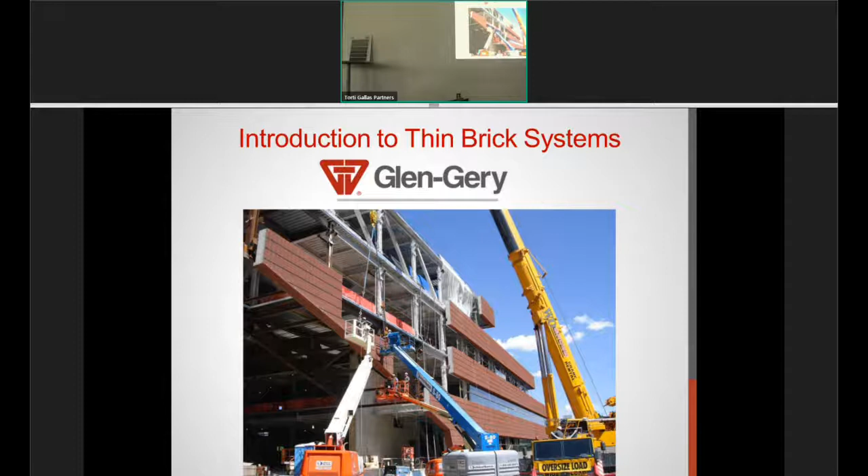Let me stick that in the USB port there. Right on, it's over here. All right, and it even works.

So how many of you consider yourselves maybe beginner or novice as far as thin brick systems? Okay, a lot of you. All right, so that gives me an idea of how much detail to go into here.

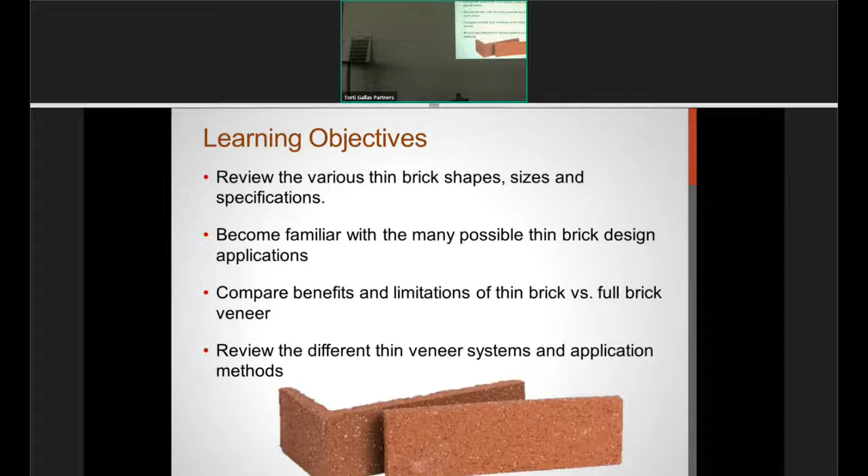So here are your learning objectives: shape, sizes, specifications for thin brick we'll look at really quickly. Design applications—where thin brick works well, where sometimes it doesn't work well, what some of the misconceptions are. You'll see that in the benefits and limitations, and we'll go over typical industry recommendations as well.

The first thing we need to be aware of is that we're talking about a different kind of veneer when we talk about thin brick. It's considered adhered veneer in the code—still covered in the veneer chapter or exterior walls chapter, but independent from when we stack brick up and use anchors to tie it back. Anchored veneer is typically 3 inches or more—that's our typical face brick. It can be up to 40 pounds a square foot, with a mechanical connection securing it to the back. With adhered veneer, one thing to be aware of is there's a difference between adhered veneer and thin brick, just like there's a difference between anchored veneer and face brick.

There are many different types of masonry units that can be used for anchored veneer, different thicknesses, all that kind of thing. So when we talk about adhered veneer today, every time we say it, we mean thin brick veneer, but be aware that adhered veneer could also include things like large format tile, manufactured masonry veneers made from concrete, even natural stone thin veneers. That's all covered in that different section.

So when you look at some of the code requirements in this section, some things will relate to thin brick and some won't. A good example is the sizes of the units—you can see 1/2 inch to 1 3/4 inches here. That's something you won't actually find in the adhered veneer section of the code; it comes from the ASTM standard for thin clay brick.

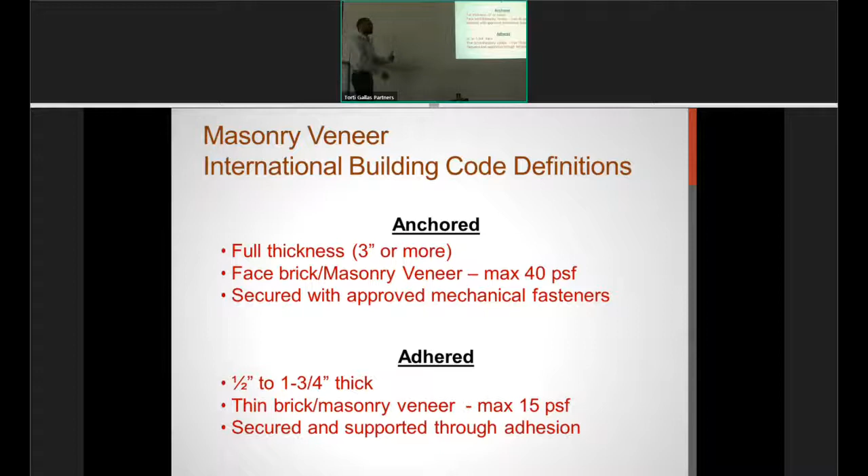Traditionally, as the name implies, these types of veneers were secured through adhesion, with a Type S mortar. If you look in the code, the only prescriptive method for adhered veneer is using Type S mortar. That means everything else - all your thin sets, all your metal panel applications - if it's not Type S mortar, it's approved by the code on the basis of testing. So basically everything else is approved on the basis of performance. You have to do wind testing, water testing, shear testing, all that kind of stuff.

One of the things I like to point out about adhered veneer is that, just like any other wall cladding system we design with, yes, I like it, and it has its applications. But I will not stand here and try to convince you that thin brick is a perfect solution for everything, because it's not.

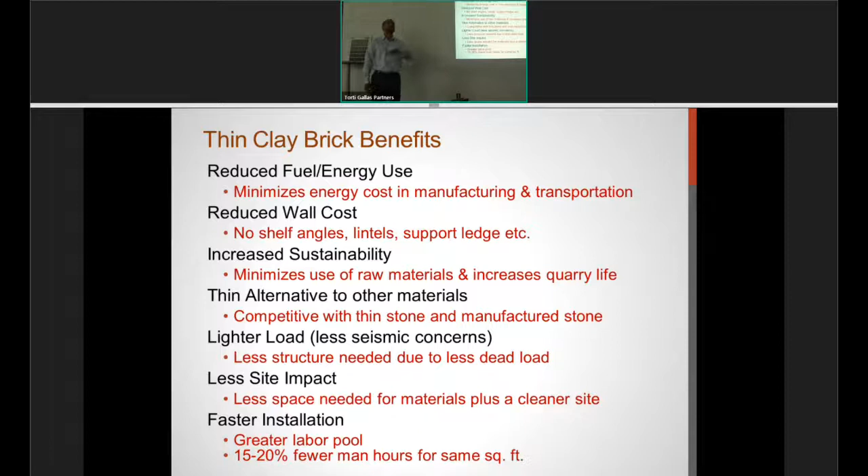As for capabilities, Bruce has already mentioned this—basically we can do any of our brick sizes up to the normal ones you use, up to utility size. We can do corners, we can do flats. We can even do what we call end caps, for when you need a return, like underneath, that kind of thing. Thickness varies.

We saw in the standard that they can be up to 1 3/4 inches. Most of what you'll find in the industry is up to about 1 inch, typically between 1/2 inch and 1 inch on the units themselves. Anything more than that we usually have the capability to do, but it's not normal—it's a special, typically because you want something like corbelling.

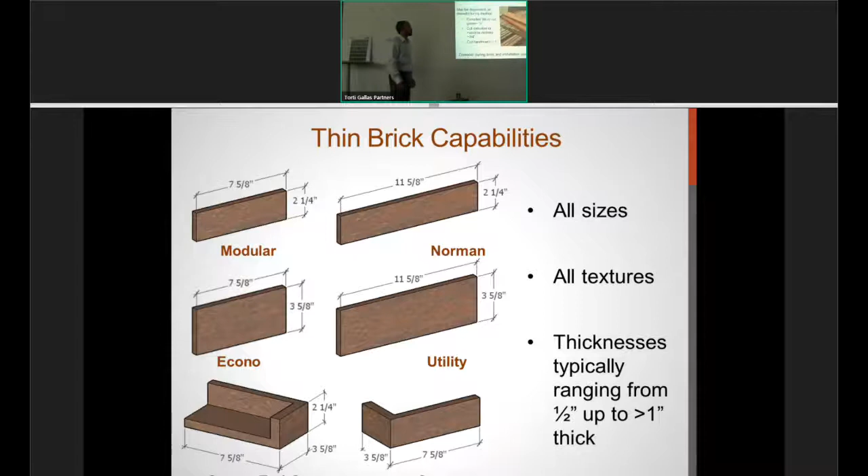So this is why we have different thicknesses. Bruce mentioned one way to make thin brick is to actually make it thin—not make a face brick and then cut a thin brick out of it, but actually make a thin thing.

The tile manufacturers were really the first ones to start doing this, so they're made like tile. The benefit is they're thinner—you usually get a really good uniform product because it's a process intended to make thin units. When that's the case, they're usually about 1/2 inch thick.

We can also take normal brick production, and just like we get a wire cut finish using piano wires to shave off the edges, we can drop a wire down a 1/2 inch, 5/8, or 3/4 of an inch on an extruded column—the way we make face brick—and it'll separate the top off while it's still green and plastic. That's also a way to extrude. In that case, all of that other clay material is perfect—it just goes back into the cycle and gets remade into more brick. So those can also be done at a 1/2 inch, basically from a face brick process.

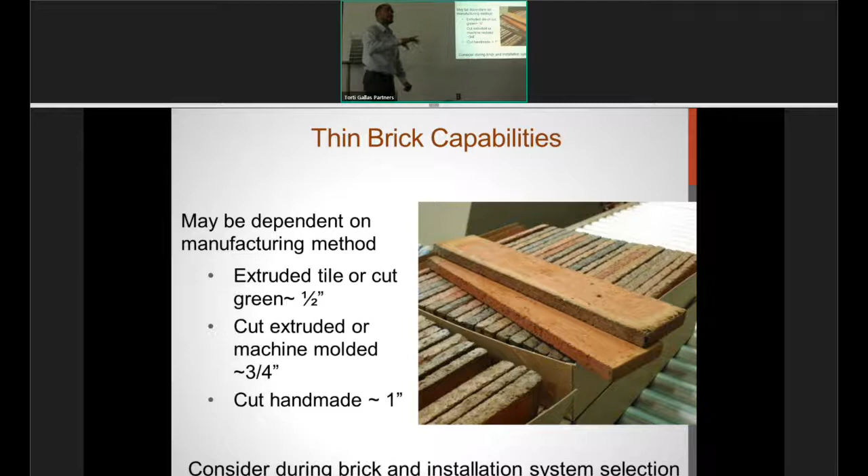The more times we have to touch it, the more we have to do to it, and that's usually reflected in the price. So for example, the most expensive thin brick you're probably going to find is a thin glazed brick - just like a glazed face brick, except now we've got to even cut it. So the manufacturers that have the ability to make a thin brick like a tile, you'll usually find that reflected in the cost. It's also the most economical way to make a thin brick. So that's that.

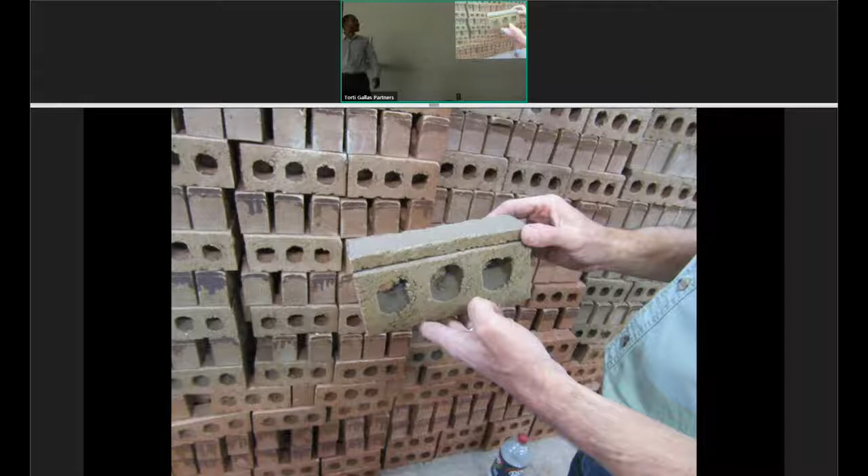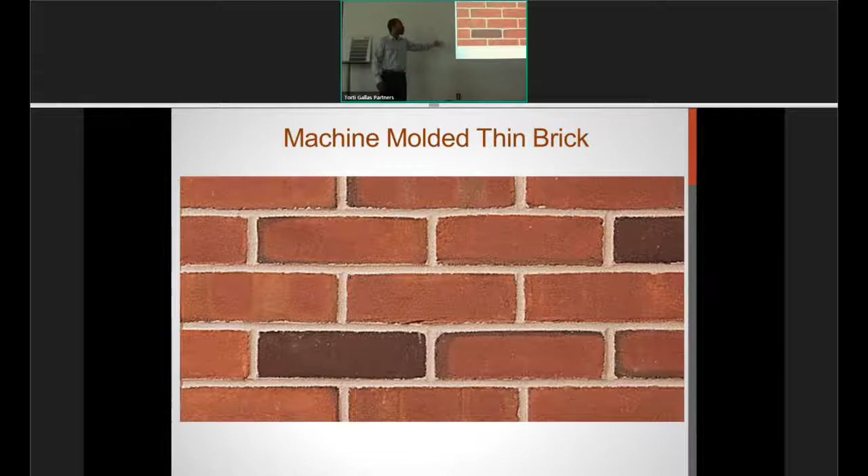So again, all the types of face brick we can do - we can do handmade, we can do machine molded, we can do extruded, we can do glaze, we can do the clay coats. Let's jump across that so we can get to some other things.

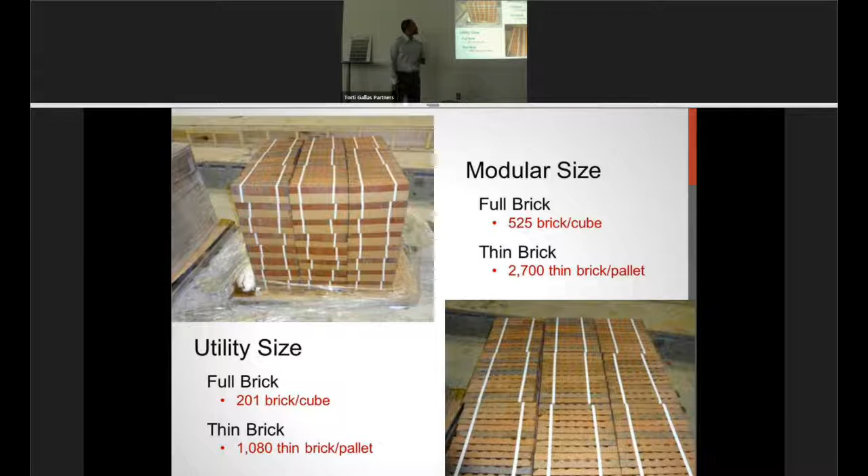So any questions just about the thin brick before we get into the installation systems? Is there a height limit to putting it on without mechanical fastener? There is not a height limit in the code for how high you can go, like there is with, say, anchored masonry veneer. What it comes down to, as far as your height limit, usually what's going to dictate it is your wind loads, because your strength has to be enough that under whatever that level of wind load is going to be, it's got to be able to keep it on the building.

So there aren't any prescriptive requirements. Keep in mind, the only one that's actually listed in the code, telling you what to do, is that Type S mortar - it just says it has to have, for example, a shear strength of 50 PSI, and that's all they tell you. Everything else, though, they've usually done testing - they've had to do the wind load testing anyway. So they typically will have a chart, or at the very least, they can tell you we've tested it up to this pressure, and you can use that to determine your allowable height in a given location.

Who does that testing? Who has done that testing? I'm not sure who did the testing - the independent lab. Because all of those types of products and systems, they're all proprietary. So they'll go and get it done in an independent lab. But we could ask you to give us a test. Absolutely.

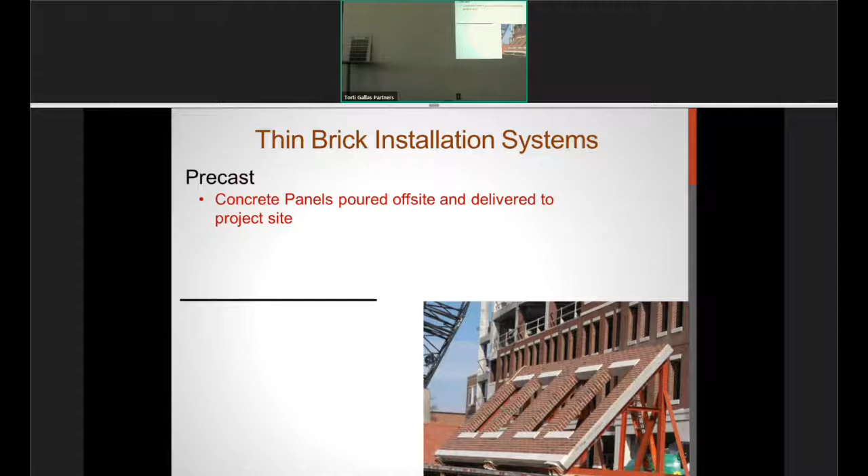Okay, so installation systems. One is going to be precast, or thin brick face precast. Tilt up, which of course is from the concrete standpoint and the pouring, and that is going to be similar - you know the difference between precast and tilt up. We have panelized methods we can use - these are panelized prefabricated stud panels, similar in some ways to precast in how they're erected, and we'll talk about some of the benefits. And then the site applied methods, which are the most common, and that's where we'll start and where we'll spend the most time.

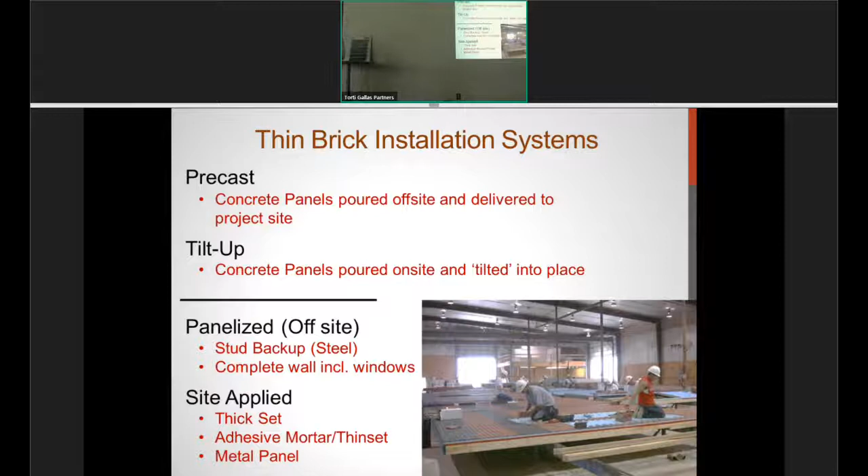So basically what we have is what we call a thick set, which is like your stucco manufactured masonry veneer method. Type S mortar, stick it in there, scratch coat, lath, setting bed. That's your thick set. It can be done over masonry or concrete backup, and it can also be done over frame walls, but it's a little bit different.

Then you've got the next evolution, which was kind of your proprietary adhesive mortars, really aggressive grab. But instead of something that's about an inch thick, now you're talking about maybe a 1/16 or an 1/8 of an inch thick. Again, those can be done over frame walls or masonry concrete. And then you've got your metal panel applications, which we'll talk about. Again, they can be done over frame or masonry concrete.

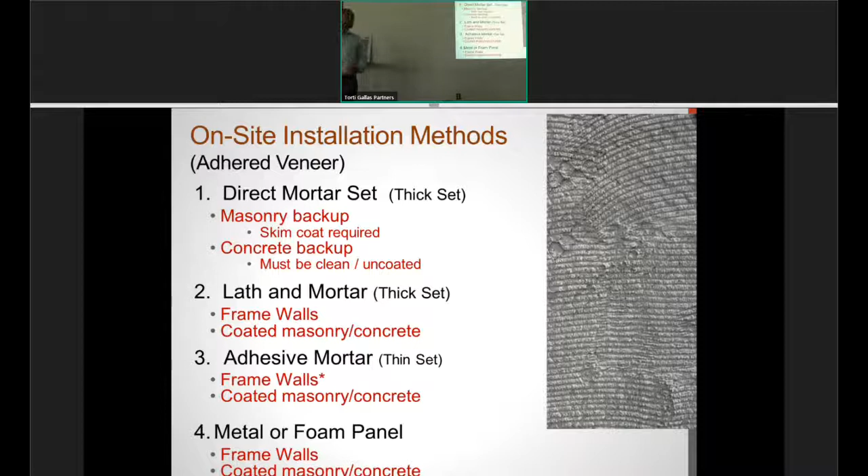So here's an overview of the thick set method. Like I said, in the code, that's the only one that actually tells you what to do. It's prescribed. Basically what it says is you've got to have a Type S mortar bed that's between 3/8 to 1.25 inches. That's the overall thickness.

Because we're looking at masonry in this case, the lath is optional. We're talking about all masonry materials here. So if you've got concrete block, for example, it's got big open pores. You slap a mortar bed over the top of it, you're going to get a good bond. If it's existing masonry, maybe it's dirty, maybe it has some sort of coating on it, something that might interfere with the bond, or you're not sure — in that case, you can put the lath on there.

The lath is mechanically attached. What's the benefit of the lath in this system? So I've got drainage over here. Anything else? Strength. Okay. Is everybody familiar with metal lath? Okay, so there's the lath.

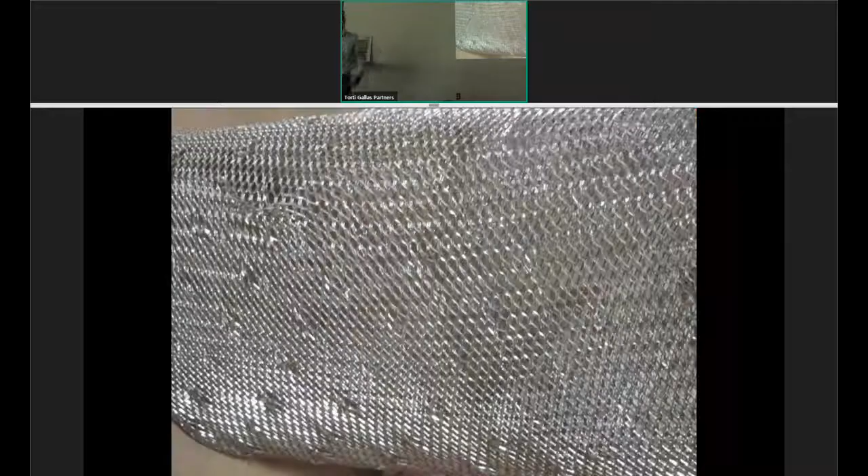What it does, basically, instead of just relying on adhesion alone, is mechanically attach your mortar bed to the backing. There's two types of lath. One is just a flat lath, standard lath, and they also have what's called self-furring lath. Self-furring lath has these deformations, basically pushed in every once in a while, and what that does is it makes it stand out from the wall instead of lying flat against it.

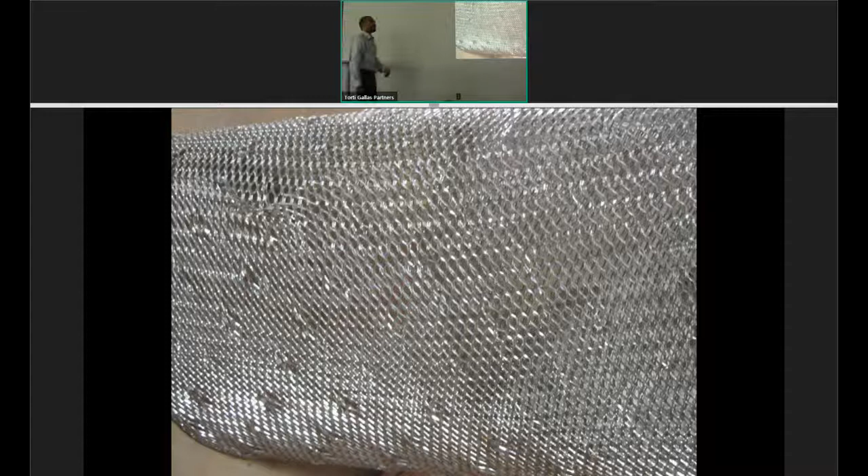Which one do you think would be recommended in the system? Okay, the self-furring lath, because instead of just laying flat against the block or the substrate with your mortar going over the top of it, it sits kind of in the middle. It makes sure that it keys in. So when you fasten that in there, now you know for sure that you have a mechanical connection. So the self-furring lath is preferred. If you use a flat lath, they also have furring fasteners — you can use a special fastener that gets that to happen.

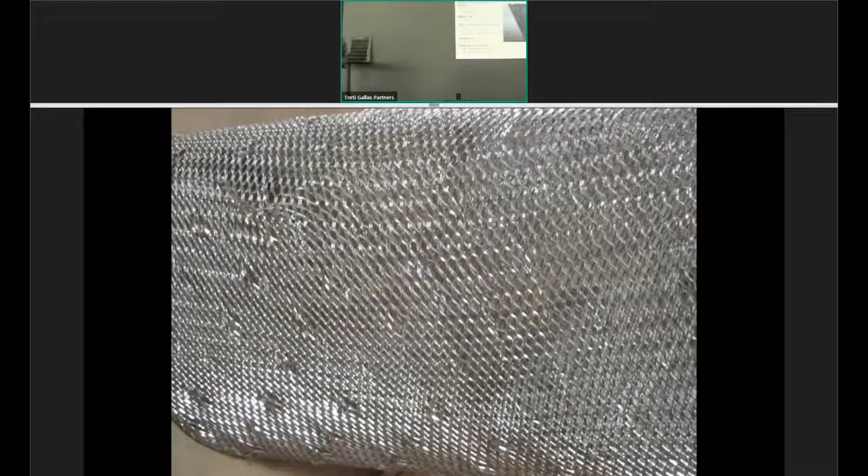So we'll go back to this. Flashing and weeps — this is going to be true for all of these systems. You do the same things that you would do with adhered masonry veneer: top of the wall, bottom of the wall, any penetrations, any interruptions. In this case, you may not have an airspace, but you might have something like a drainage mat behind it, the stucco product. It is, yeah.

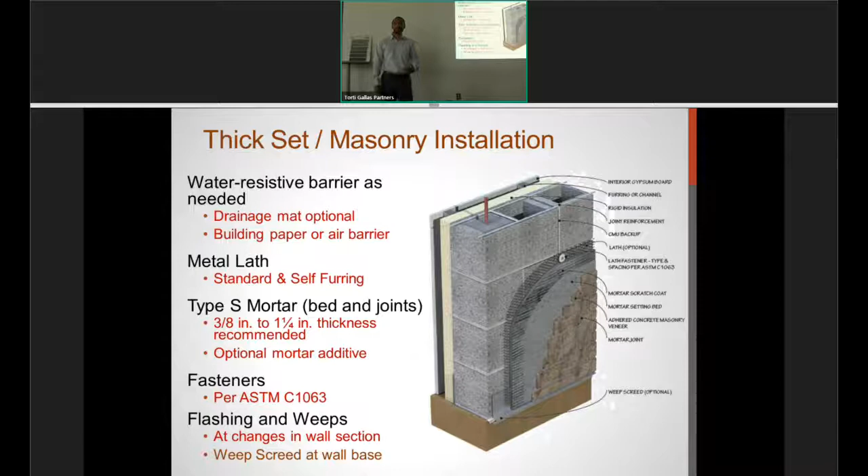All right, so if we look at this method over a stud back, one of the significant things that changes — actually, I need to go back to this. In most cases, you're going to need an air barrier in the assembly, so you're going to have something that functions as both. If that concrete or concrete masonry wall is designed and built in accordance with their respective chapters of the code, you're not actually required to have a water-resistive barrier. You're usually not going to skip that, but I point that out because that's one of the differences between when you put it on frame.

When you put it on frame walls, the standard, the default is going to be that you need 2 layers of a water-resistive barrier, or something that has the testing to show that it gives you the performance of at least those 2 layers. If you happen to know the ASTMs, that's D226 Type 2 — basically, it means it has a 60-minute performance, okay? So that's important. There are some cases, and with that Type 2, you can do 1 layer of a Type 2 water-resistive barrier, and then you can use an airspace or a drainage mat, and you're good. You don't need anything else.

So the lath, in this case, is a critical component of the system because that mortar is not going to stick to fiberglass face sheathing. All right.

I'm sorry, I jumped. No.

So still the Type S mortar bed again, in this case with mortar additive. You can use it in the other system too. In this case, it's going to increase your bond and increase your durability.

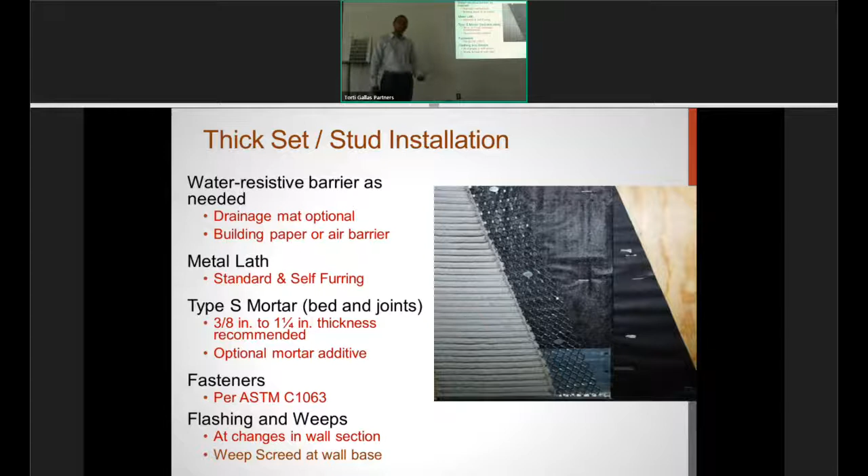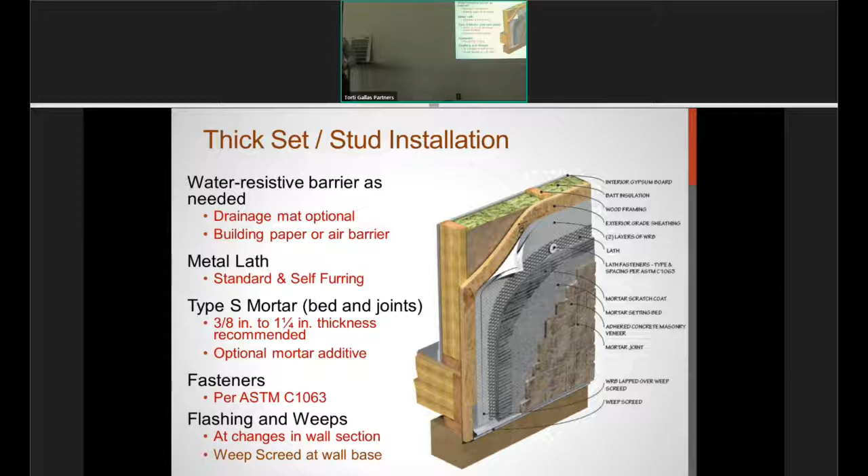The fasteners that you see there are just the lath fasteners, don't worry about that. So there's a look at that system. Big difference you can see is the 2 layers of water-resistive barrier, and now that lath is a critical component of the system.

This shows a pretty typical process. Top left, you've got your water-resistant barrier and your lath attached, with the scratch coat going on at the bottom. Top right, it's being scored. And in this case, bottom right, he's not actually doing a mortar bed on the wall, a bond coat. He's just back buttering the units, then he'll apply it, and that's an acceptable method.

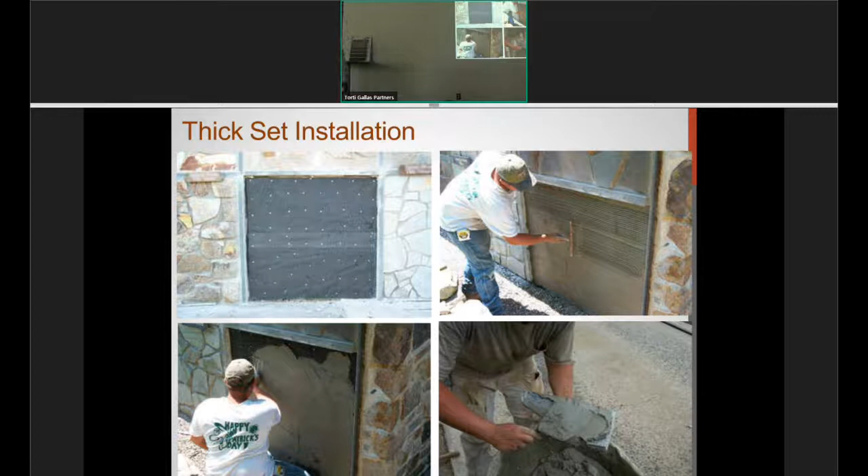Pretty simple. This is the installation method that relies the most on the mason's skills to keep everything level and plumb. Keep in mind, your backing matters. This is one of the differences between the systems - how flat your substrate is.

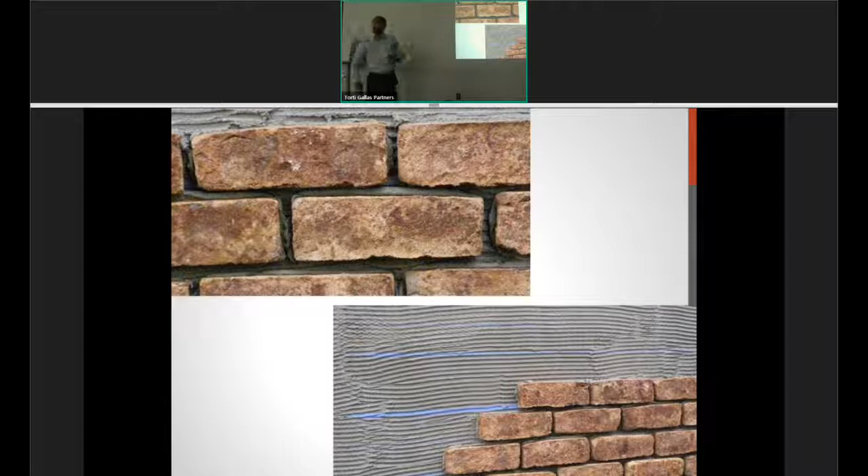In this case, you've got roughly an inch or so of mortar that you can actually make up any small variations in the plane of the substrate. With some of the other methods we're going to talk about, you don't necessarily have that.

Any questions about thick set? It keeps water from getting behind it, freezing and popping the brick.

But we never use it in this climate. I was about to say the same thing. Like this method is why we were always so reluctant to use it when it's full stories up in the air and worrying about it popping off and hurting somebody. So we only used to use this when something was turning back over a roof before the mechanical attachment. You see it a lot in one-story retail.

Yeah, exactly. It is the most widely used method. It's the most widely used method because it is the most economical method. It's the cheapest one to do.

But it's been done for a long time, and we've probably all seen, or if you haven't, the rest of us could easily show you where there's a failure of this system. When it's done right, it can work, but there are a lot of things that can go wrong. The standard at this point, which we didn't show here, would be if that system is done, there's almost always a drainage mat behind it, so at least if water gets in there, it has an opportunity to drain out and dry out, reducing the potential for freeze thaw and that kind of thing.

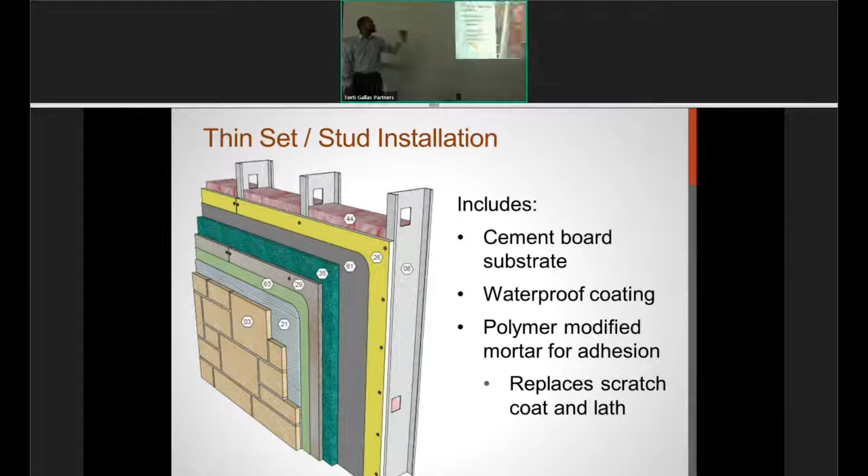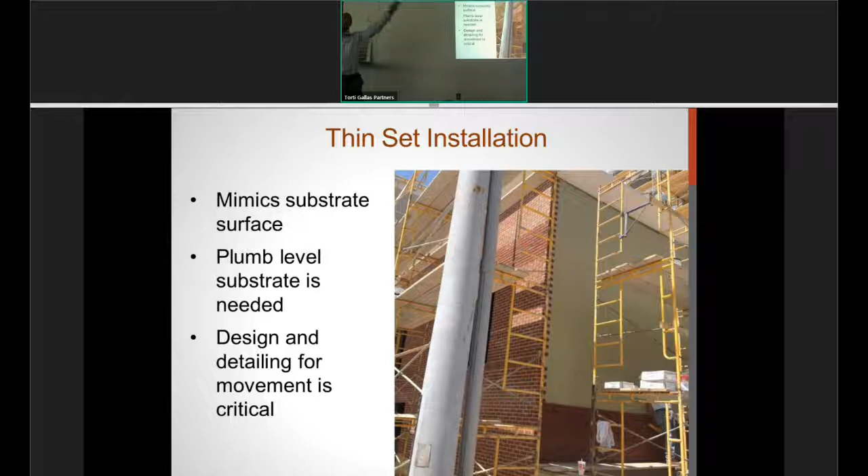I will point out that among all the systems, this is probably the most expensive. So if you're doing, let's say for example, a whole interior, this is one of those cases - maybe you use this system for the ceiling, but for your walls you use something else.

Questions about thin set? Okay, then we've got metal panels.

So with metal panels, the default as far as your water resistant barrier is going to be the same as with the other systems. If you're over concrete or masonry, you don't necessarily need one. If you're over frame, then the default is going to be 2 layers. This is where things vary a little bit - there's a few different kinds of panels out there.

One kind of panel is going to have a flat profile. So if you've got a flat profile panel, you're going to have your 2 layers of water resistant barrier behind it, or your 1 layer of water resistant barrier that gives you that type 2 enhanced performance, with a drainage mat or a drainage space.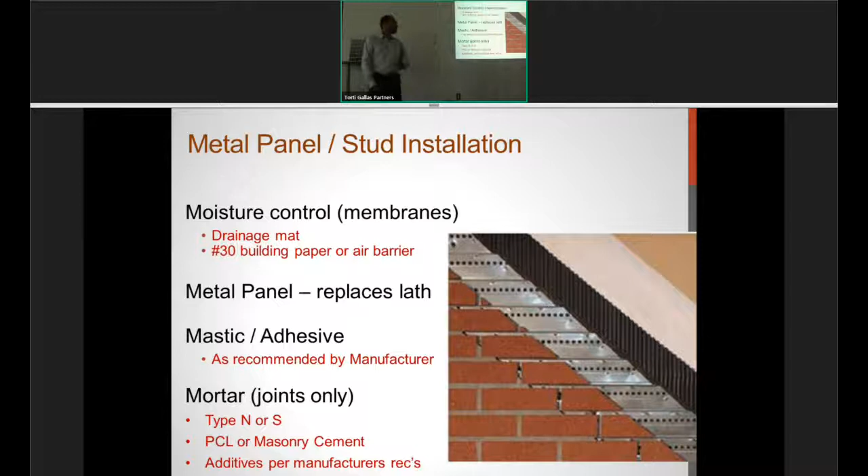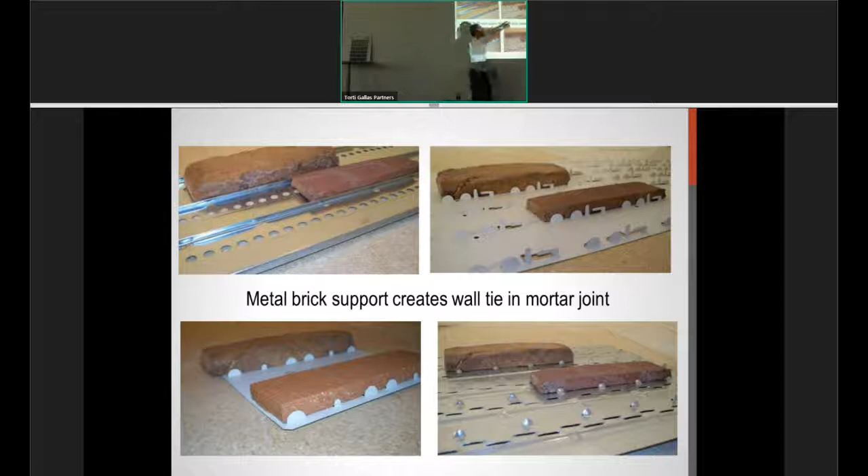You can see the first one shown here, yeah, there's no actual clip. With this one, these little parts right here can be bent down, and so when they're bent down, they act like a tie when you put the mortar in, which is great as long as you're paying that one guy to go and bend all the tabs down. Because the warranty for that system depends on that.

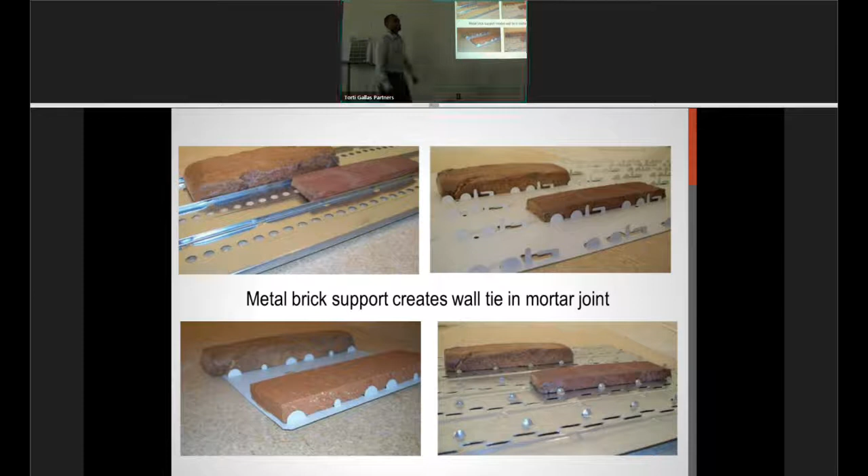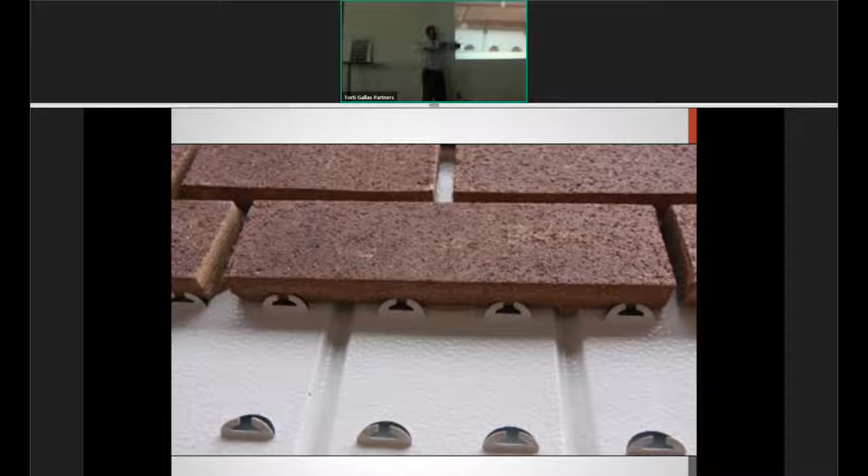There's an example of another one. In this case, because it's open, when you put the mortar in there, it grabs it without someone having to bend it down or anything like that. There's a shot of it from the back, so you can actually see how it engages the mortar.

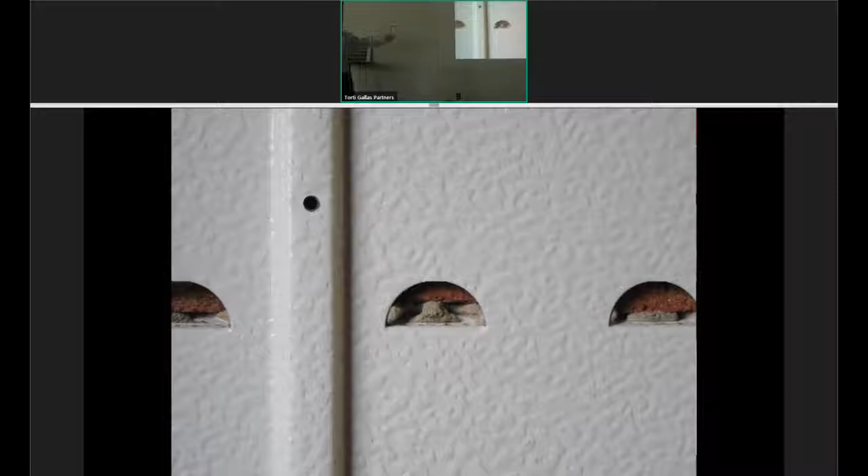So there's standard panels and there's drainage panels. One of the reasons we're seeing a lot of this is because you can add continuous insulation into your wall without increasing the thickness of the wall. If you need 3 inches of insulation and you're doing face brick cavity wall, your wall just got 3 inches wider. In this case, you could do a 1-inch veneer, 3 inches of insulation, and you didn't change your overall thickness.

A couple of things to keep in mind, this stuff weighs up to 15 pounds a square foot. So when you're putting that right up against the backing, your fastener doesn't need to be that great, but when you're hanging it 3 inches off the wall, you need a more robust fastener. This is just like with our anchored veneer, when we started making those cavities wider because we wanted to put all that mineral wool in there, we had to do engineered fasteners or engineered anchors, the same thing happened here.

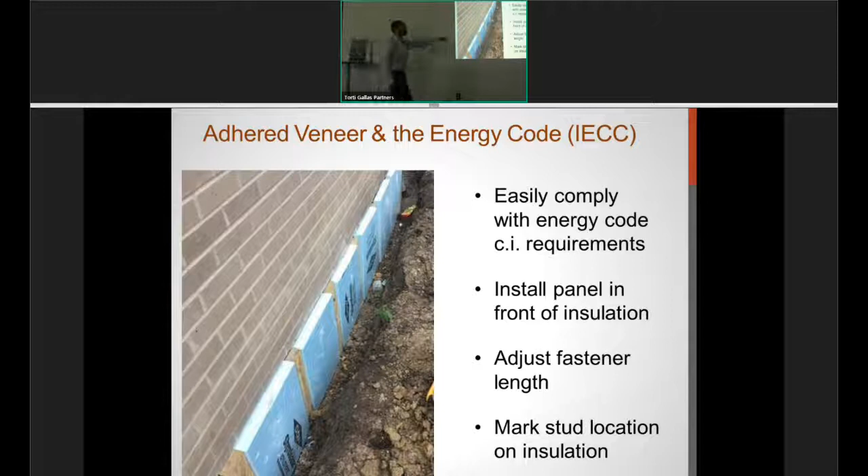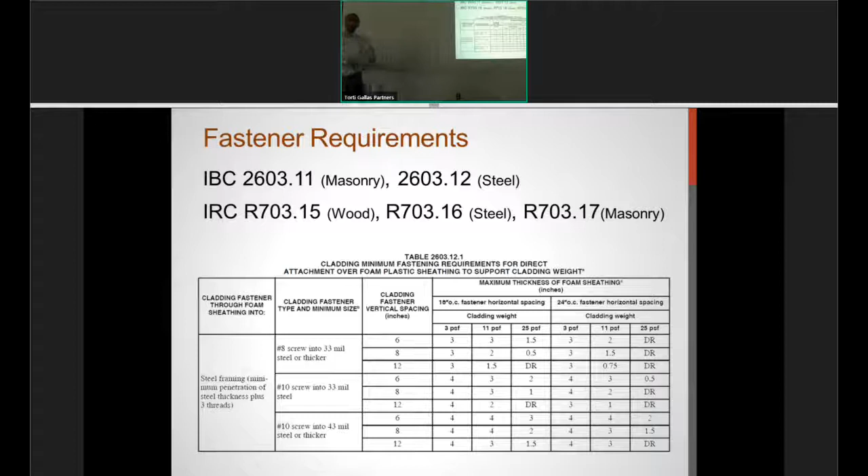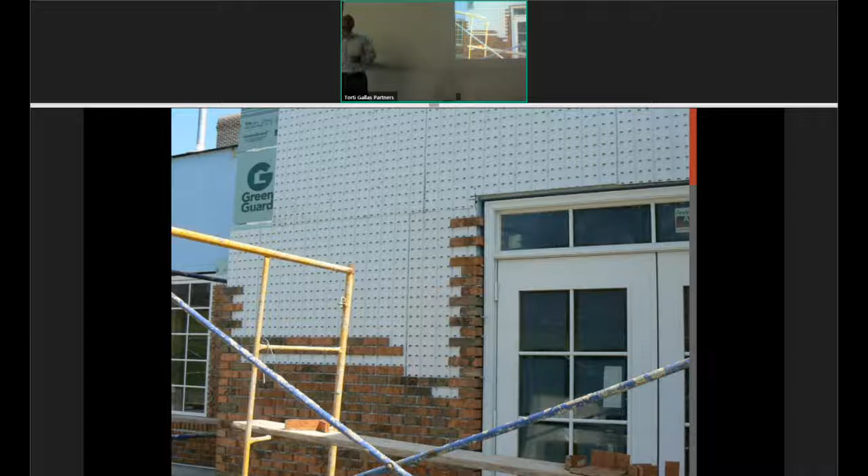All right, so this just shows one of the panel systems going up. You can be kind of schizophrenic with them. You don't necessarily have to start at one place, end at one place.

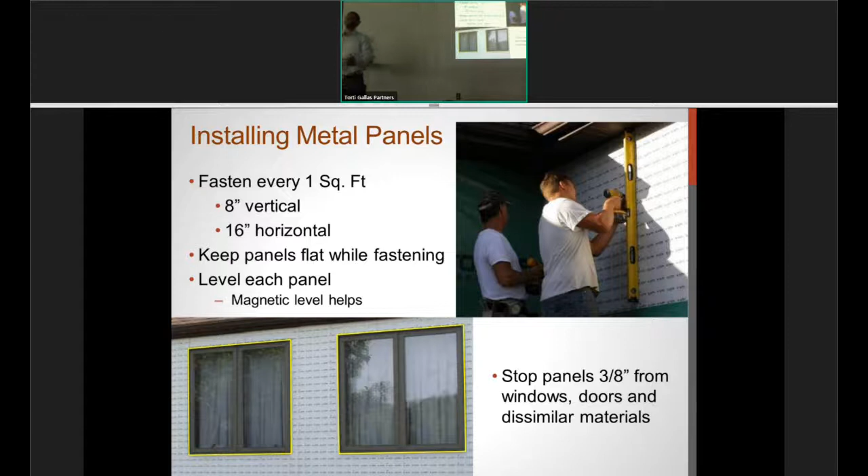Keep in mind, this is true of all of these systems, you still have to detail for movement. You need to leave movement joints around your windows, your openings. You need to break up the facade. It's still brick. Even though it's thin brick, it still expands the same amount as face brick does.

One of the thin set manufacturers actually did a study using mason crews and carpenter crews, looking at how much time it takes and all that kind of stuff. In that study, they found that the carpenter crews could put their system up about 20% faster than the mason crews.

It sounds counterintuitive, but what happens is if you're doing something like a metal panel system or a thin set exterior where you have to put up that cement board, all the time goes into putting up the substrate, cutting your insulation board, cutting your cement board around your openings, cutting your metal panels, planning all that. Your carpenter crews, your siding installers, they do that stuff all the time. The masons don't really do that.

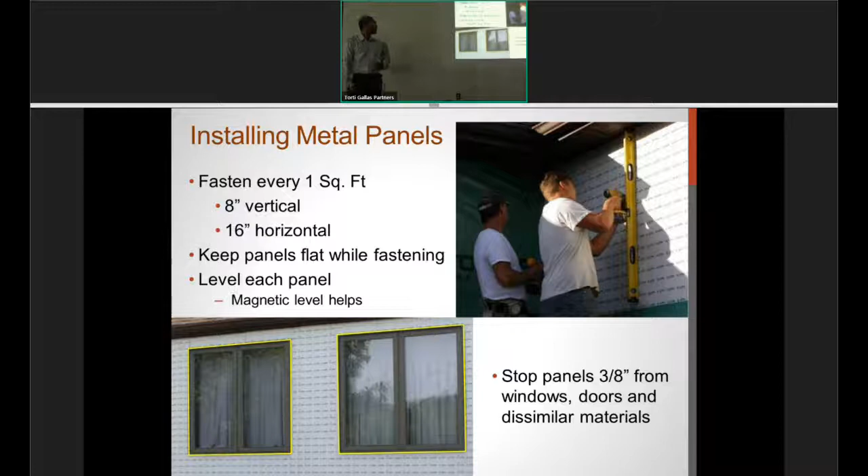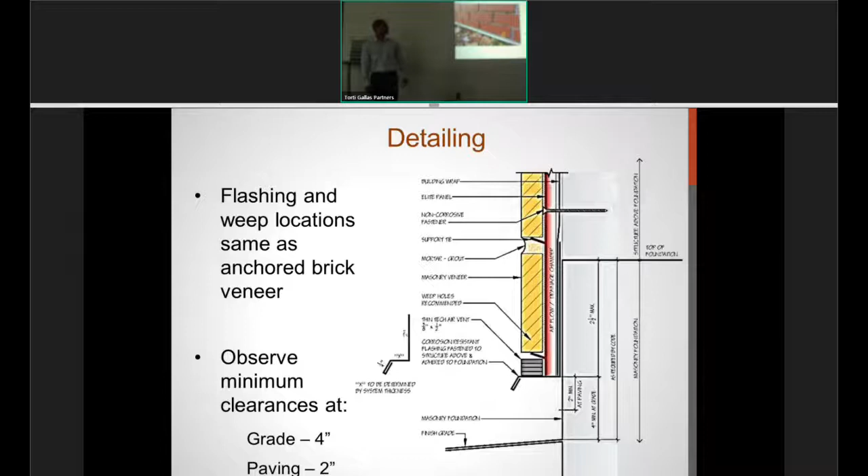So then the joints are just filled with mortar. The good thing about any of your proprietary systems, whether it be a metal panel system or your thin set systems, is usually there's a lot of support. There's a warranty involved with them. You can go to the website. There's standard details and all that kind of stuff that you can go and look at for your common applications.

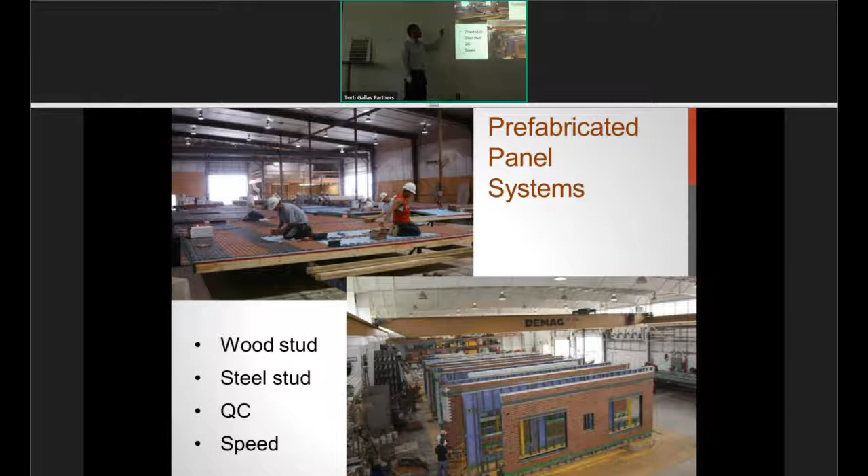Really quickly, I want to tell you about the prefabricated panel systems. Like I said, these are full wall assemblies that can be hoisted by crane. From that standpoint, kind of similar to precast.

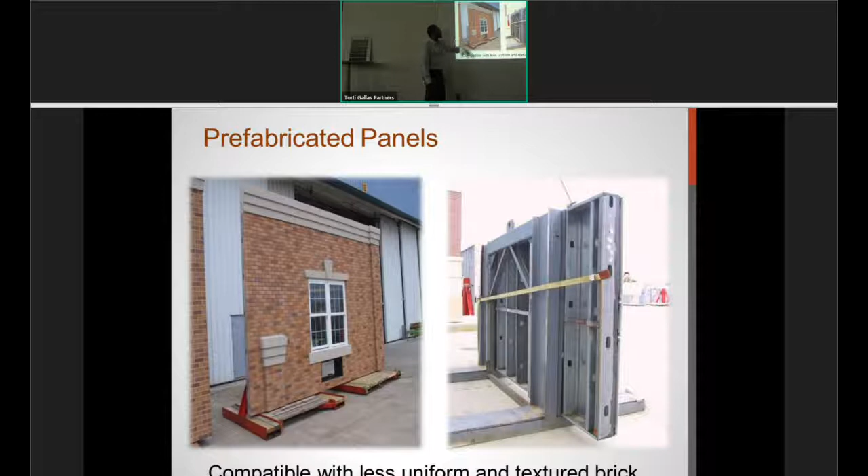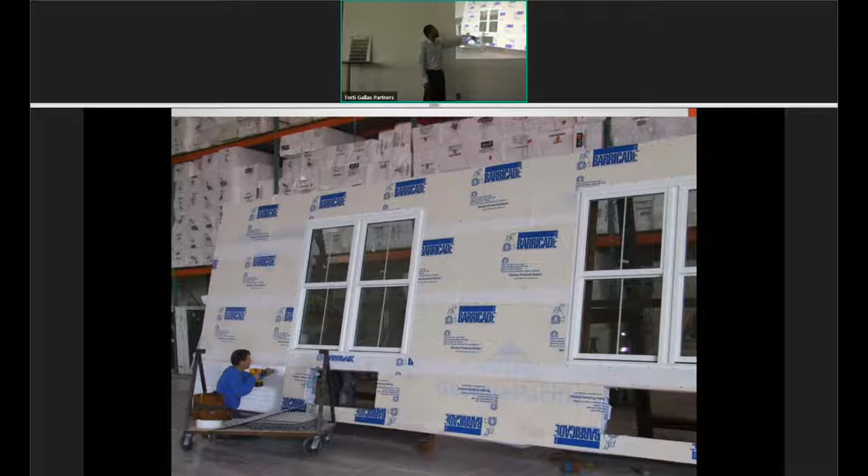Done off-site, good quality control, not as much affected by weather. As it relates to using brick with them, you can use pretty much any brick with these. You can see it says compatible with less uniform and textured brick. I'll explain that in a moment, but usually the way that you put the brick on these types of panels is those side-applied methods: thick set, thin set, or panel systems. So here you can see you got your sheathing, WRB, and there's a metal panel going on. This is an example of one of these being done at a prefabricator down in Richmond.

Here's an example. I pass by this exit all the time, going back and forth to our plant. Two weeks from foundation completion to first burger. This is the prefab project. Can be done really fast.

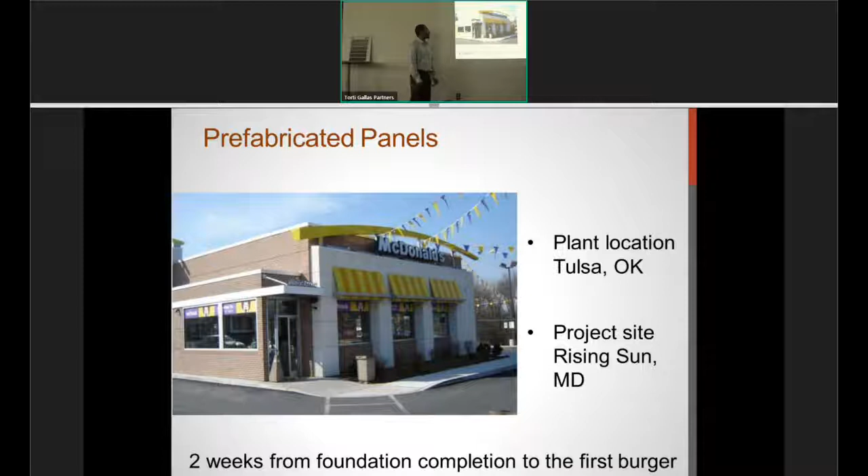Okay, precast and tilt up. Couple of points on those really quickly. How many have worked with thin brick face precast or thin brick face tilt up before? Okay, give me some pointers. Give me a learning that you have from that process. Or did everything go completely smoothly?

Well, there's limitations on how projections can be beyond the face of the brick, because when they lay the brick on the panel, it's flat, and anything you add to create depth is additional charge or complexity. That was the biggest hindrance. You couldn't have any depth to the panel. It's going to be a flat panel.

So the first thing that you want to know about any precast application for thin brick or tilt up, you always want to let your supplier know that the brick you're selecting is for precast or tilt up. Because a molded brick, for example, I think we talked about it when I was here one time before, molded brick tend to be a little bit more irregular, not as uniform, which means size variation is going to potentially be a bit more. There's a gap between the brick and that liner, and concrete bleeds through.

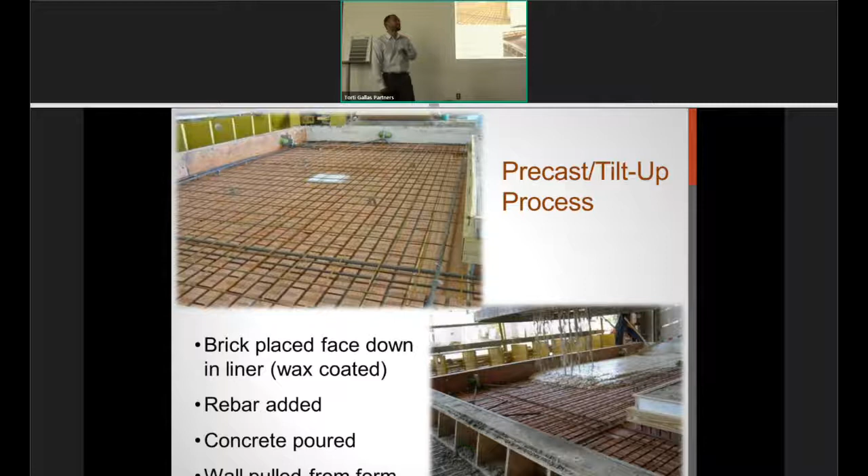No, it doesn't wear away, it runs away, it flies away. So that's something to be aware of. Usually it is possible to do, and we have done projects, but in general, a molded brick is probably going to be discouraged. Something with sand coating, that kind of thing, even on an extruded brick, is going to be discouraged for these types of applications.

All right, there are different types of liners, we won't go into that. Again, the main thing is the Precast Pre-Stressed Concrete Institute. They have their own standard for what they think a brick that goes into precast should be. It's different from the ASTM standard. Which one do you think the brick manufacturers make their brick to? ASTM, okay? So their requirements are actually more stringent than the ASTM requirements.

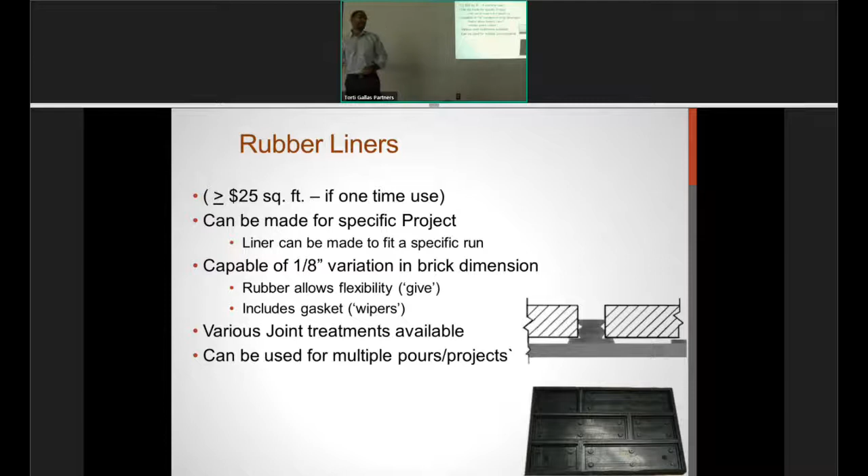So that's something to be aware of with precast tilt up. Some manufacturers don't have the ability to actually meet the dimensional tolerances that they need to for the precision with those jobs.

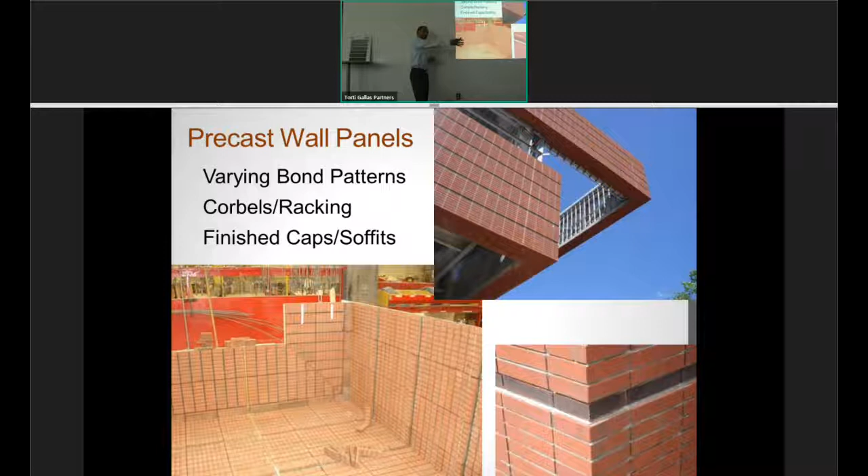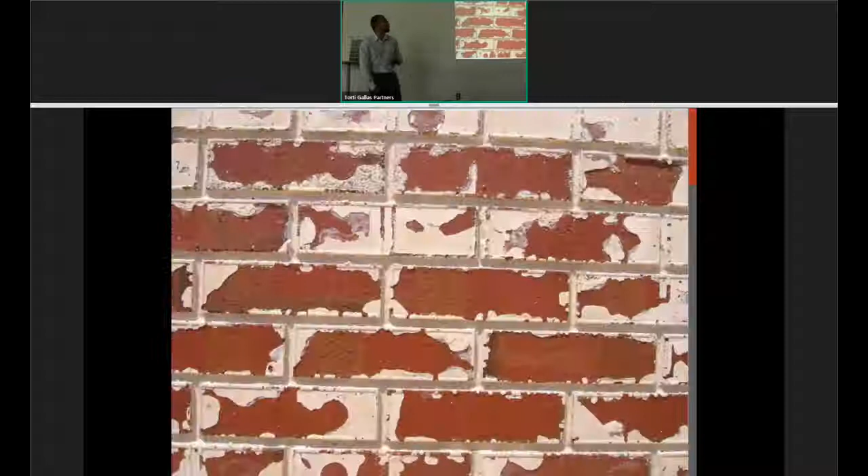One of the benefits of this, I think, is obviously you have reinforcing and everything, so it gives you a lot of design flexibility. Also, as you mentioned, it's an extra cost, but you can change the depth of the form, and you can do some really cool things, because you can bring that depth back into masonry, and you can do things like... I know it's here, like that. Okay, that's a thin brick face precast project. Working with the manufacturer, again, this is just a quick look at another one.

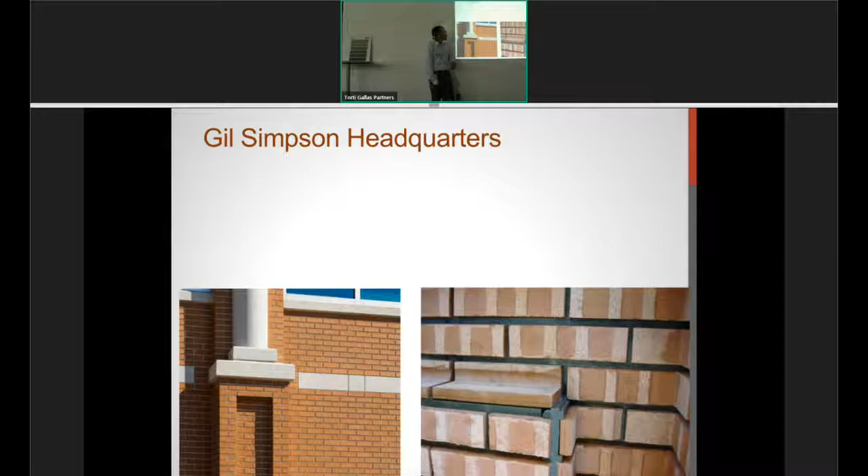This project had these piers with these reveals in them. We can help you identify where you have special shapes. You need an end cap there to have a brick finish. If you look at this, it's one brick long, so that's a thin brick, only three-quarters of an inch. Rather than have a joint there, if you want that to look right, you need a special unit with two ends. The only way to get that is to cut it. You can't extrude that as a tile.

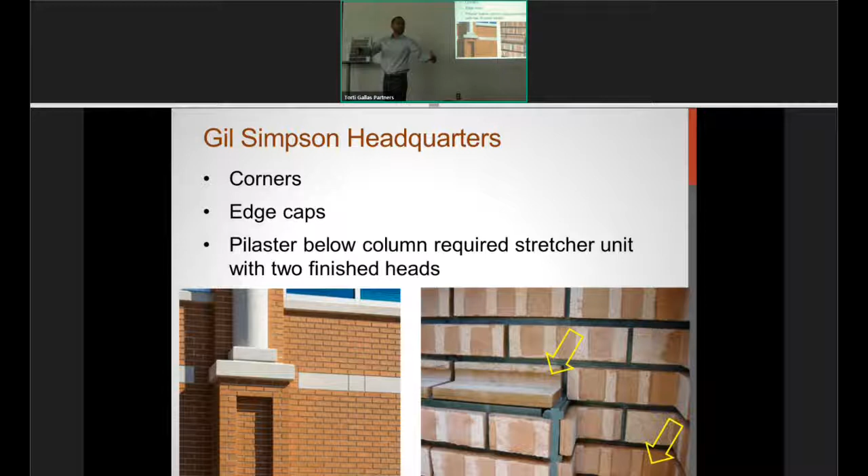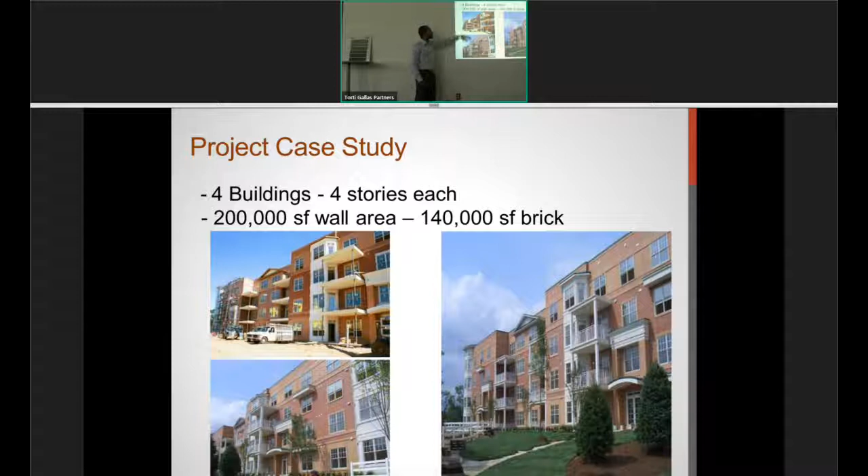That's the kind of thing we have the ability to help you with. This was a case study, four buildings, four stories. You can see multifamily here. Don't pay attention to the numbers.

I think what's important here, from a cost standpoint, is that everybody seems to think initially that thin brick is going to save money on a project. That's certainly not always the case, especially when you look at everything apples to apples, just looking at square foot install costs, because that doesn't bring in things like freight savings, less lintels, shelf angles. That's where your savings usually come in with thin brick, not just as it goes up on the wall, but those things you don't have to do because it's thin brick rather than full face brick veneer.

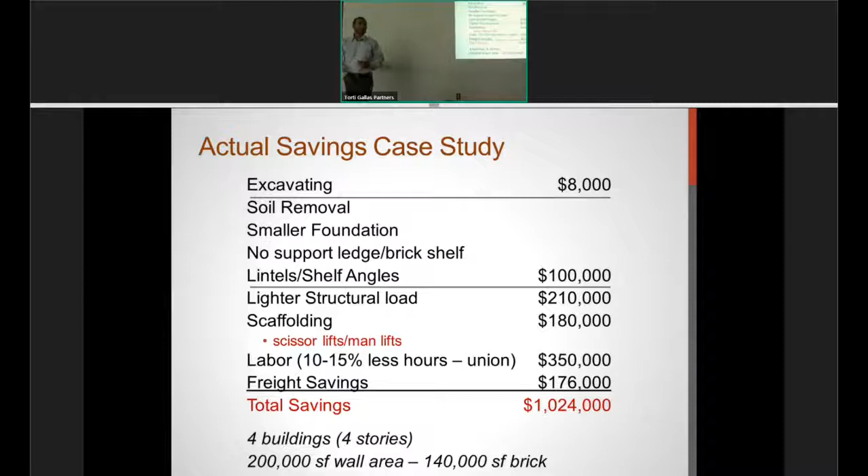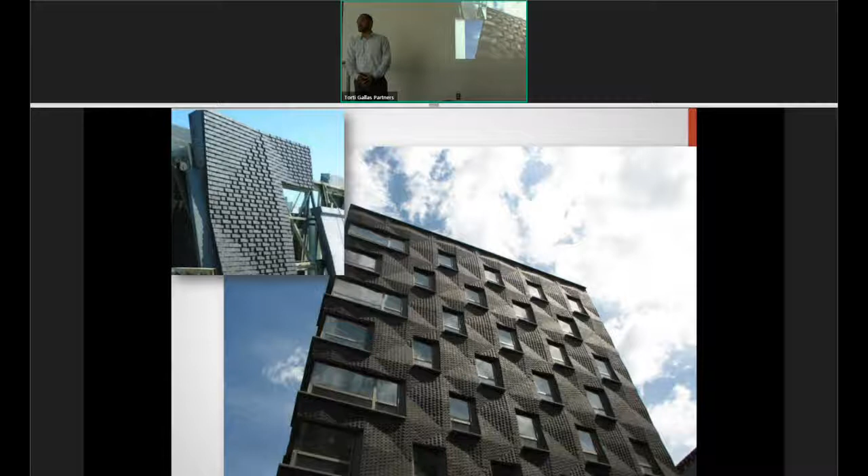So those would be the potential areas. When you have things that are more complex, give you a lot more labor, take a lot more time and steel to do, those are the kinds of things where thin veneer may actually save you some money. Otherwise, if you're just changing from face brick to thin brick thinking it'll save money, if it's something that can be easily done with face brick, it's probably not going to save you anything. It may actually cost you more. So play to the strengths of whatever the system is.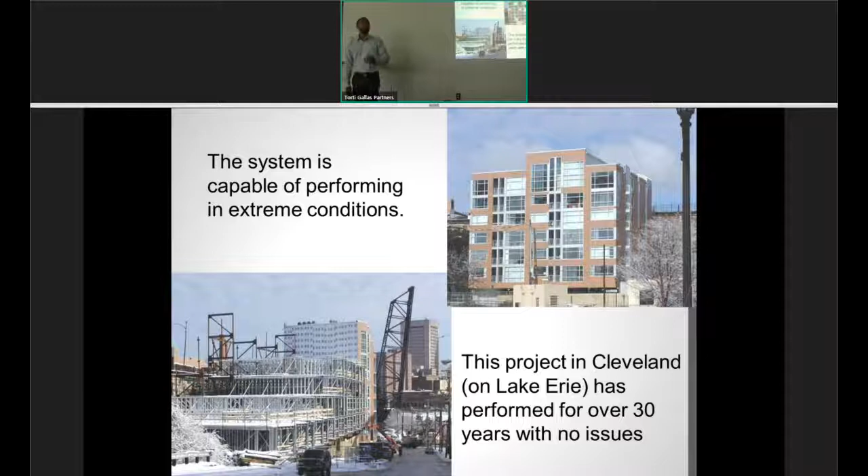Thin brick systems, veneer systems, have actually been around for quite a while, nearing 40 to 50 years. There's some really bad systems out there, and over time things have gotten better. There's some really good systems out there too. I actually visited this project just a couple weeks ago, right on Lake Erie in Cleveland, and it still looks good. It's been performing for over 30 years with no issues.

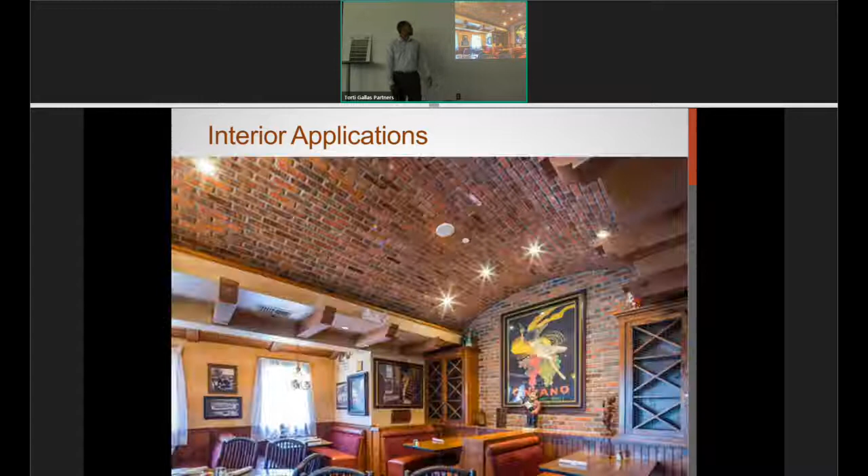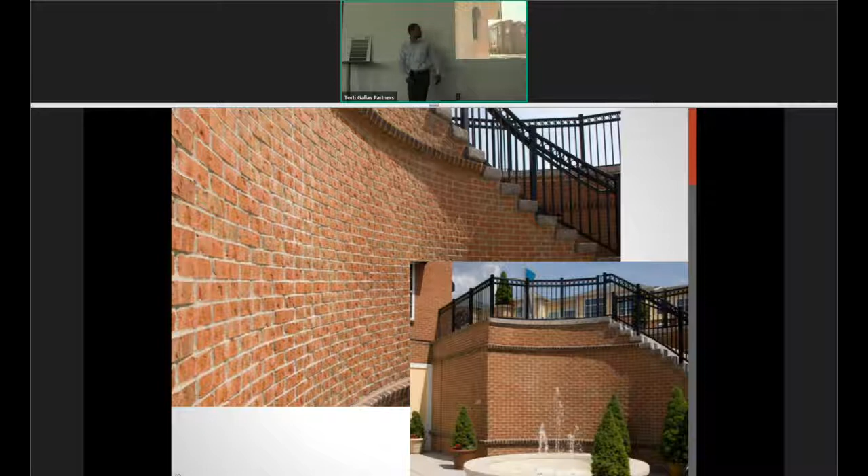Obviously if we can do all that on exterior, we have interior applications we can do as well. These photos show some of those things. You can see that vaulted ceiling I mentioned. We can do curved walls. We can do special shapes to give you corbels, projections, sills, that kind of thing as well. You mentioned arches.

Two engineering degrees, I might have told you this before. Two engineering degrees, almost 20 years in the masonry industry. I'm not touching a structural brick arch. Don't even ask. If it doesn't follow those rules of thumb, nope, not doing it. I'll do that all day long with thin brick. I think it's one of the easiest ways to accomplish that aesthetic.

This shows some of the other different accent types of things. Generally when you see this, this part isn't adhered. It's got a special clip or a channel, and there's a groove in the top of the brick that holds it on. Usually anything more than about 1.5 inches, that's the case. It's not just adhered onto the wall.

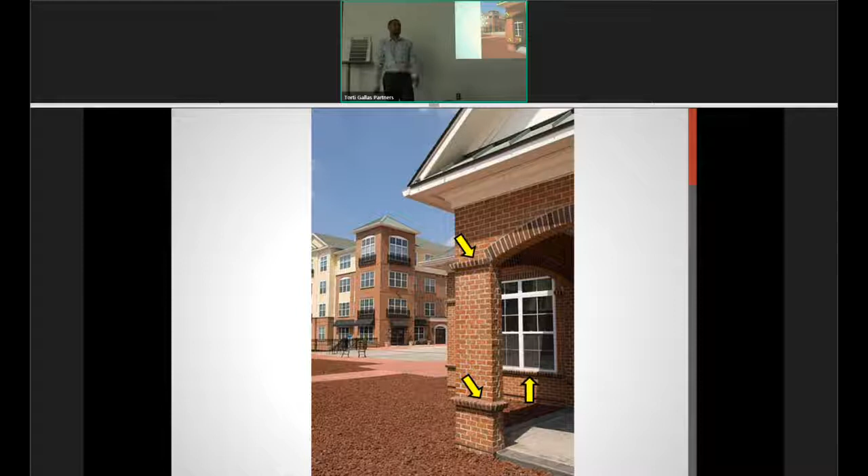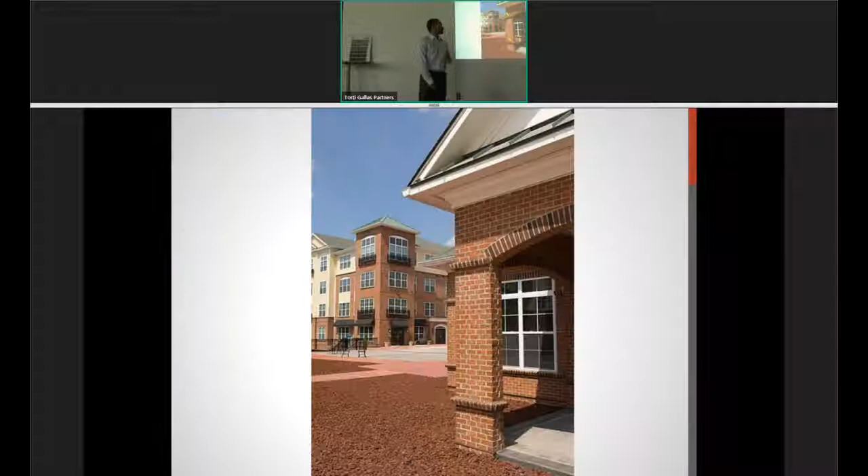If you wanted to do an arch like that, would that be a thick set mortar application, or how would you do that? It could be done in thick set, yeah. It could be done in any of the methods. If it's me, I would do it in thick set or thin set before I would try to do it with a panel. I think a panel kind of gives you more headaches. What I would do if using a panel system is run the panel system to here, put my flashing there, and then do a thin set for that point.

Thank you. Other questions? All right, thank you for hanging in there with me.